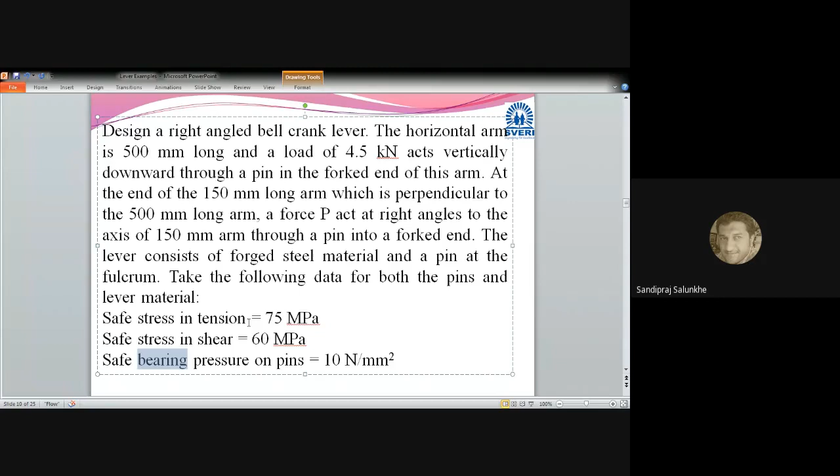Now read this statement carefully. You'll come to know that there are three pins of this bell crank lever which are connected to the lever.

Now see, this is a bell crank lever. One arm of this bell crank lever is 500 millimeter long, where W is attached. The other arm, which is vertical and 150 millimeter long, has force P applied, that is the effort. And this is the fulcrum point. So we are going to name it as B, F, A or A, F, B. This is what the lever is.

And we are going to consider B as the width of this lever and T as the thickness of this lever. This cross section is shown in this diagram. Do you get the idea how the bell crank lever is? Any question?

Now, when we start to solve this problem, it is given that FB, that is F to B distance, is 500 millimeter. Then W, which is at point B, is equal to 4.5 kilonewton, that is 4,500 Newton. F to A distance, that is the fulcrum point to the point where P is applied, is 150 millimeter. Then sigma T, that is allowable tensile stress, is 75 megapascal, that is 75 Newton per millimeter square. Allowable shear stress tau is equal to 60 megapascal, that is 60 Newton per millimeter square. And bearing pressure is 10 Newton per millimeter square.

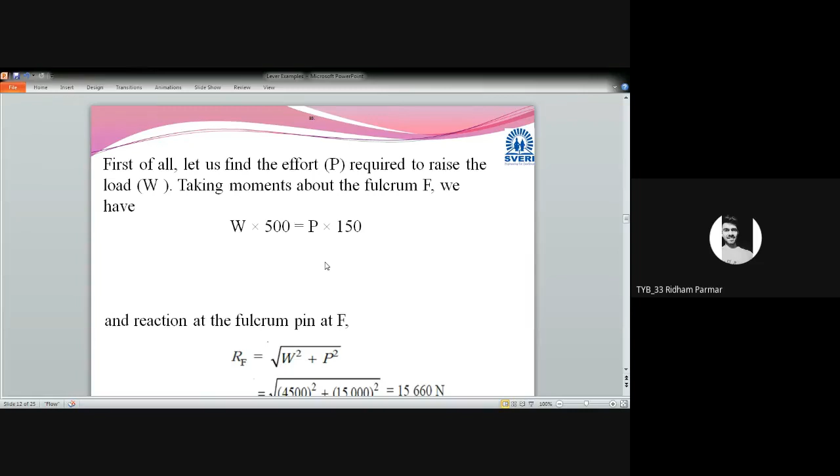Last two. Adesh Bankar. Hello? Adesh Bankar. Ritik Bhosle. May I know where Ritik Bhosle is? Ritik Bhosle. Can you unmute yourself or just type your message? Are you listening, Ritik Bhosle? Hello? Saurabh Dhotre.

Yes, sir, what answer did you get? Sir, continue. What? 2 minutes. Calculating, not continue. Continue means you are giving an order to the person talking with you, that continue.

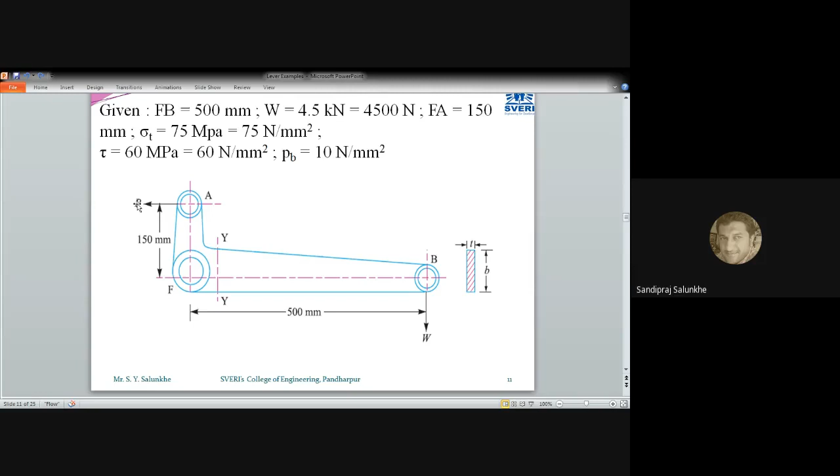So RF, that is the reaction at the point of fulcrum, we are going to calculate by means of this vector and this vector. Its resultant will be W square plus P square, whole under root. So we get that reaction, RF is equal to under root of W square plus P square, and that we get as the reaction at the fulcrum point.

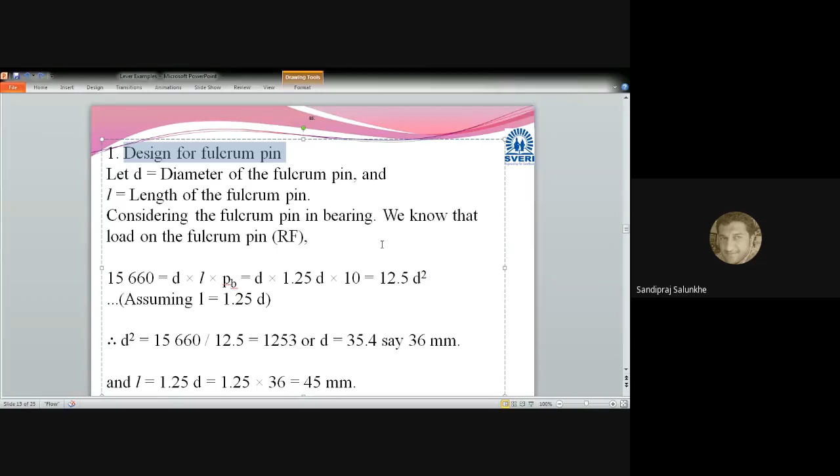Once you get this reaction at the fulcrum point, let's start to design this pin. So we are going to design the fulcrum pin. First, the pin which is joined at the fulcrum, that we are going to design. For that, let us consider small d as the diameter of the fulcrum pin and L as the length of this fulcrum pin.

And do you remember what ratio we have taken for length to diameter of this pin? Are you remembering? For yesterday's problem also we have taken that ratio. Hello? Hello?

We are going to consider that the length of the pin is 1.25 times the diameter. We have solved yesterday's problem also by assuming length of pin equal to 1.25 times the diameter of that pin. Yes, sir, right.

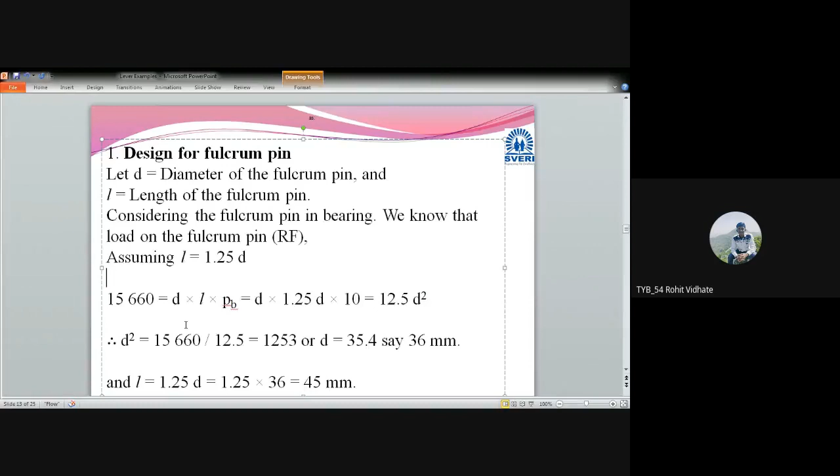Are you getting this point or not? Yes, sir. Or should I elaborate it? Should I elaborate? Yes, sir. Okay, I'll write here this formula by means of which we are going to calculate the pressure intensity. So this pressure intensity, P suffix b, we are going to calculate.

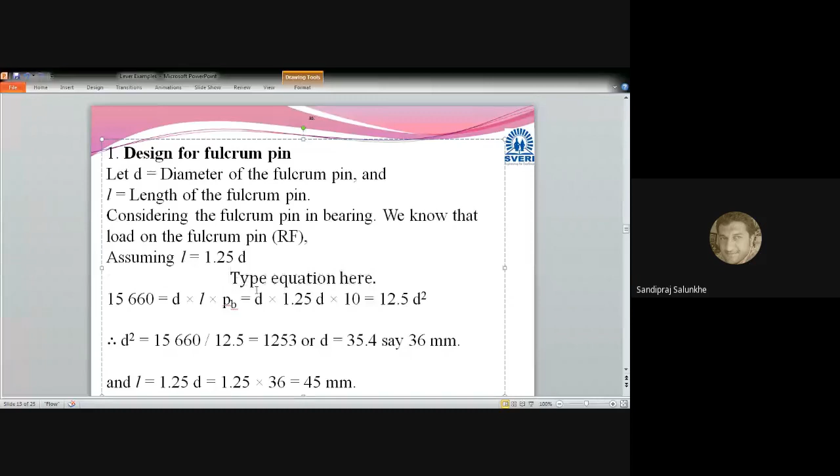This pressure intensity P suffix B is given by, how we are going to calculate pressure intensity? Force divided by what? Pressure is equal to force divided by area, right? So force which is coming on the fulcrum pin is 15,660, divided by what is the area of that pin?

Now as it is circular area, we are going to convert it into flat area. For yesterday's problem we have solved it. So area will be D into its length, L. So what we have done for this formula, we have converted it.

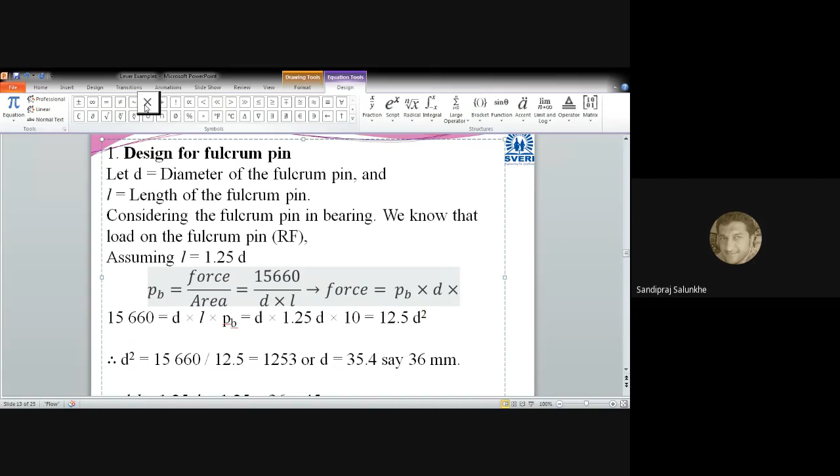This D into L is coming in at this point. Here I want it, D into L. So this pressure intensity formula we have written as force divided by area. Force is 15,660 divided by area, which is D into L of that pin. So how that D into L again we have taken?

Just I will draw here that pin. This is the pin which is inserted there. So what we are going to calculate is the area of this pin, and this area is calculated as this distance multiplied by this distance. That is the length of the pin multiplied by diameter of that pin, and that will become the cross sectional area of that pin, though it is circular. This is the circular area which is sustaining that pressure. We are going to consider it as a flat approximation, and we have considered it as a flat area.

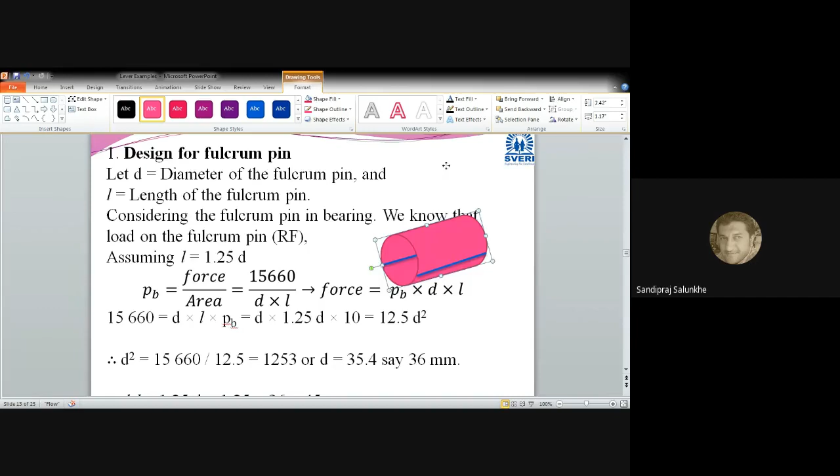If you are not getting it, please let me know. You can ask a question at that place only.

That's why we are going to put this value of L as 1.25 of D. And hence we get this W, that is 15,660, is equal to D, that is diameter of pin, multiplied by 1.25 of D, into intensity of pressure. Intensity of pressure is given as 10 Newton per millimeter square. So we have 15,660 is equal to 12.5 into D square.

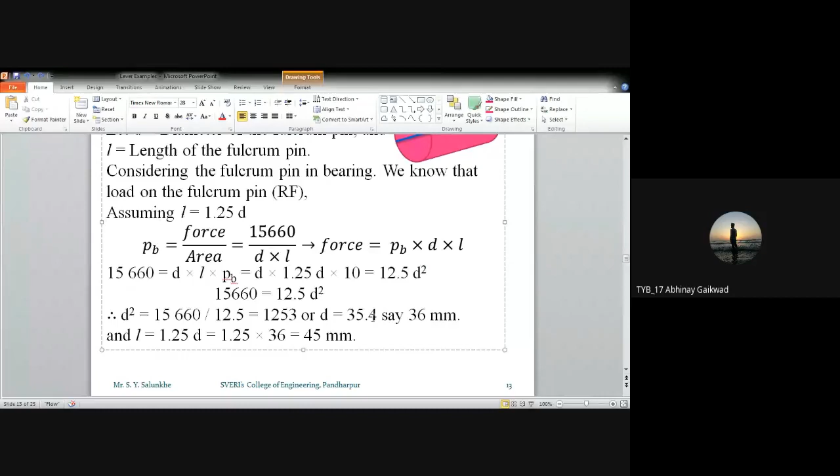From the above equation, we have got this equation. So one can calculate this D. So what value of D have you got? 35.39. Okay, you are getting this as 35.39. So we'll approximate it to 36 millimeter.

And from this, we are going to calculate length, because length is how much? Length is 1.25 times of D. That's why length of this pin is 45 millimeter. Is there any question related to this up till now?

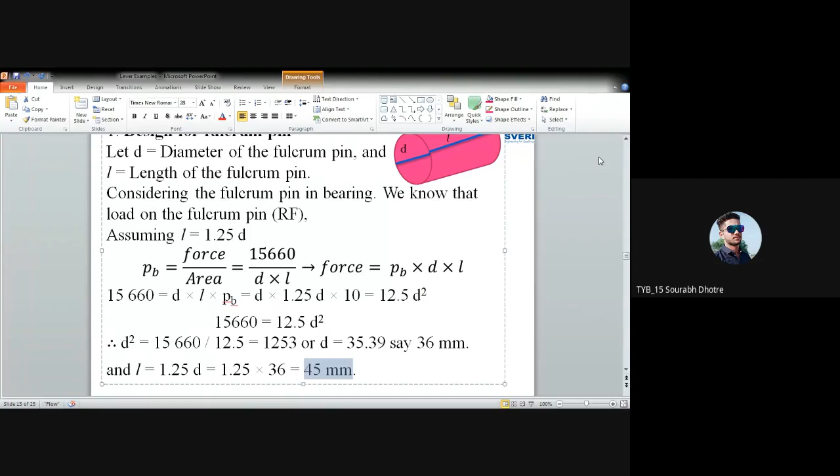Yes, Saurabh Dhotre. I'm not listening to you actually. Got it, sir? Got it?

Okay, so the next point is that you have to check this pin in shear. So what will happen in case of shear? What formula do you have to write? First, tell me what formula you are going to write considering shear stresses in this pin. It will undergo double shear, am I right?

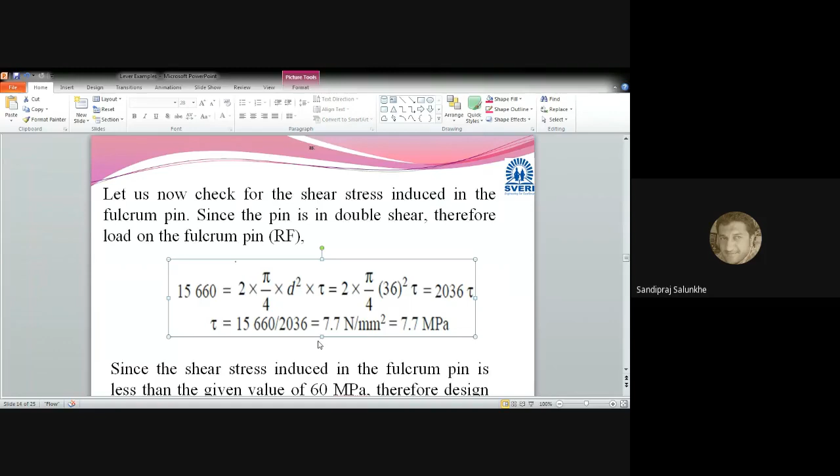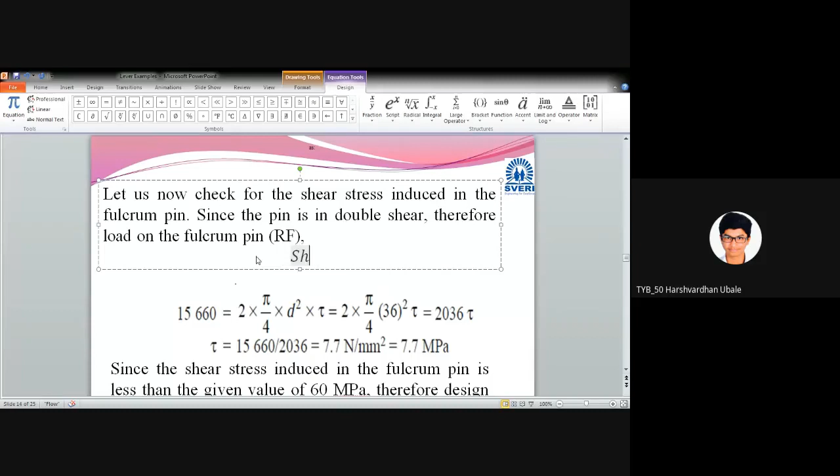Okay, so what formula can we write? Shear stress is equal to force per unit area. Stress is equal to force divided by sustaining area, am I right? Correct, yes sir. Okay, so what can we write next?

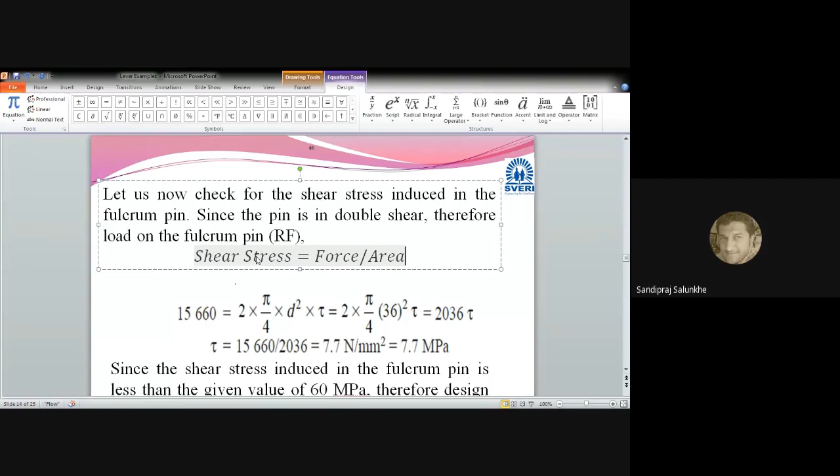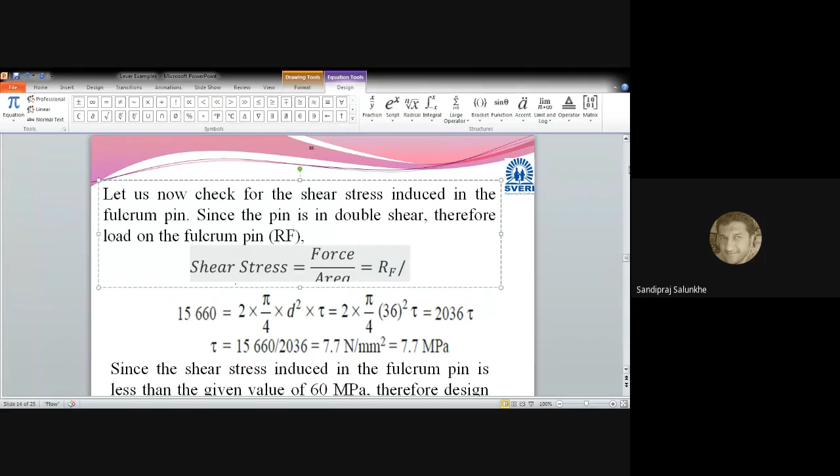How much force is acting on it? Fulcrum reaction, RF, right? So we have to write here as R suffix F. So fulcrum reaction divided by what will be the area? Now this pin will undergo double shear, so the area will get multiplied by 2, am I right? This will be sheared at 2 places.

Okay, what will the area be? 2 into pi by 4, D square. What will D be? That is the diameter of pin, squared, am I right? Yes, sir.

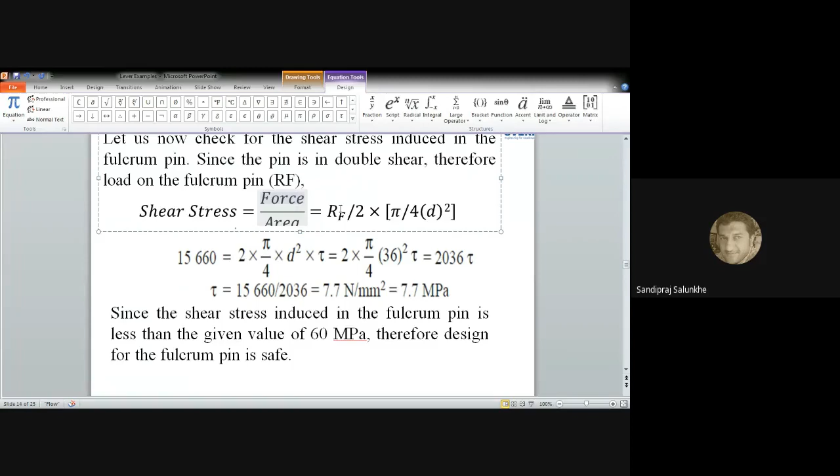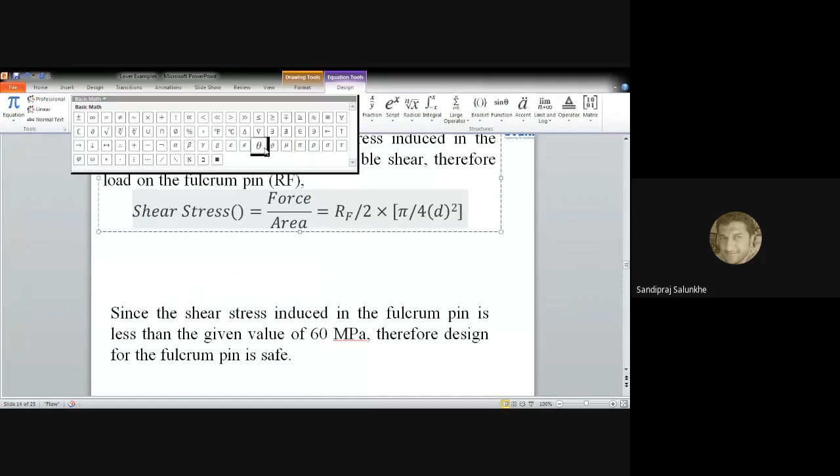So when we write this formula, you just have to calculate the value of tau. This shear stress is nothing but what we are going to write as tau. You tell me, calculate and tell me what value of tau you are getting. Later on, I will put my answer.

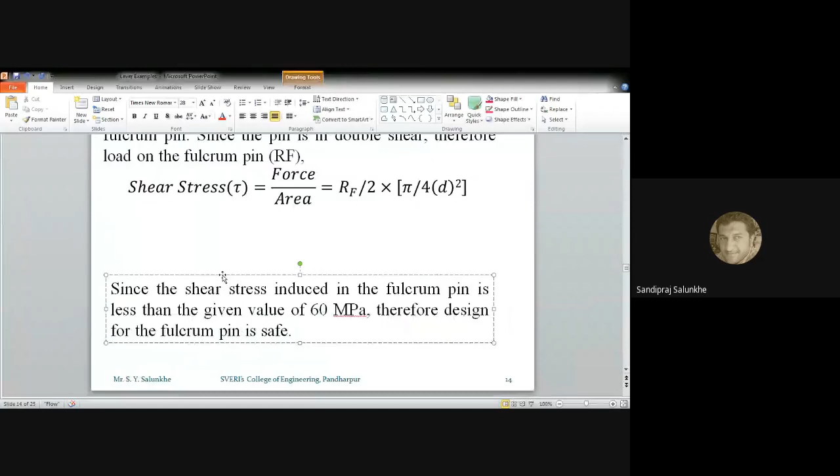Sir, 7.69. Anybody else? RF is known, D is known, just we have to calculate tau. 7.69, same sir. 7.69, 7.61, okay 7.69. Pratik Deshmukh, put your message for what value you are getting. Vaibhav More has written 7.69. Ekatpure, what value are you getting? Prerna Ekatpure, are you there? Snehal Mane, Prerna Ekatpure has written, okay, 7.69. So you have got it.

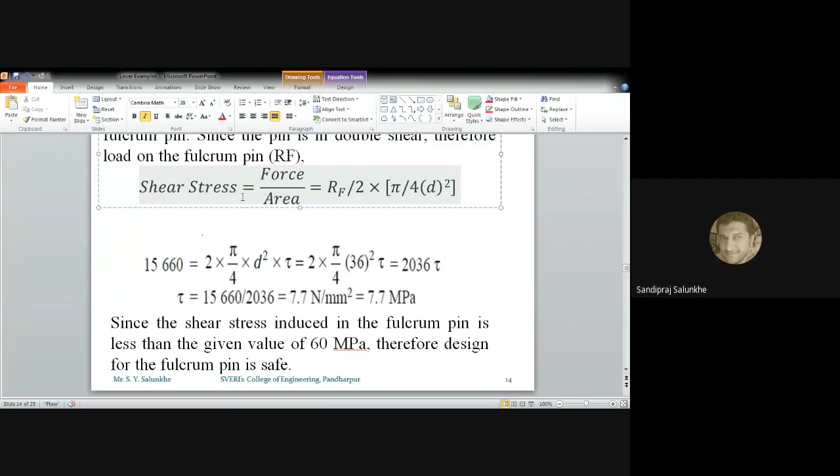It is approximated to 7.7. And what value is given in the problem for shear stress? What limiting value is given for shear stress in the problem, how much is it? 60 MPa, sir, right? So can we say that the dimensions which we have decided for the pin are safe? Yes, sir, yes, that's why it's not necessary to go again.

Somebody has asked me a question, what will happen if we consider other relations, that is if L is equal to 1.30 of D or if L is equal to 1.50 of D, we will get a different answer. Okay, but it's not necessary to consider that different value. Now see, this length is equal to 1.25 of D. That is the standard one we have chosen from the design data book, where guidelines are provided to the designer to make design simple. Okay, any question?

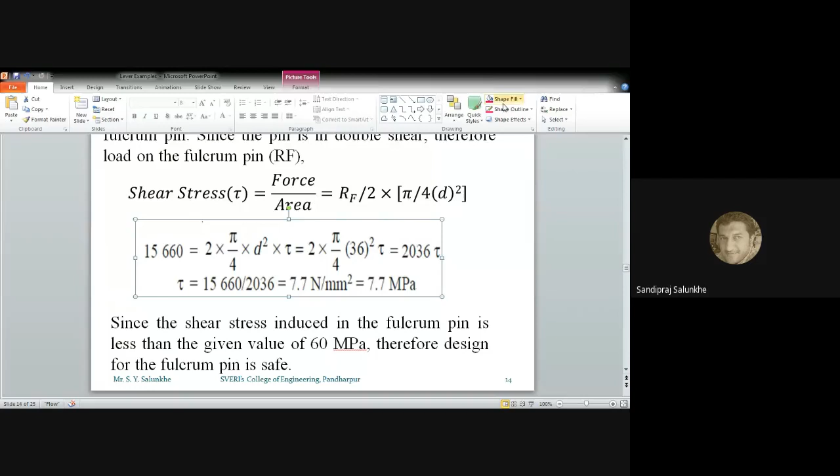So can we go further? Yes, sir, okay. One more question I would like to ask, whether this method is good, where I'm going to type here and you are getting it. Yes, sir, yes, yes. Okay, instead of only reading that slide and explaining it, if I write here and make the change, that will be better, is it right? Yes, sir, okay, okay.

Now we have designed the pin at fulcrum. Now we are going to design a brass bush which we are going to insert in that hole provided for the fulcrum pin. Let us assume the thickness of this brass bush is 3 millimeter. What thickness did we choose for the last problem, are you remembering? How many, sir? It was 2. Okay, here I have chosen 3. Yes, yes, yes.

So is it random that we can choose the thickness, or is there some logic behind that? Let me tell you one thing, this thickness of bush is decided as from 2 millimeter to 5 millimeter. Already in the first lecture, when we started this design of lever, that statement was there. From the design data book, it has been stated that bush thickness ranges from 2 millimeter to 5 millimeter. So here we have chosen 3 millimeter, one can go for 2 also, one can go for 4.

That depends upon how much force is exerted on that bush. The force is considerably high, how much is it? 15,660 Newton, that is the force, fulcrum reaction, which is acting on the pin as well as on the bush. That's why we have chosen the thickness of this bush as 3 millimeter. So the hole which we are going to drill on that lever, that bell crank lever, will be of size D plus 2 times the thickness from this side and from this side.

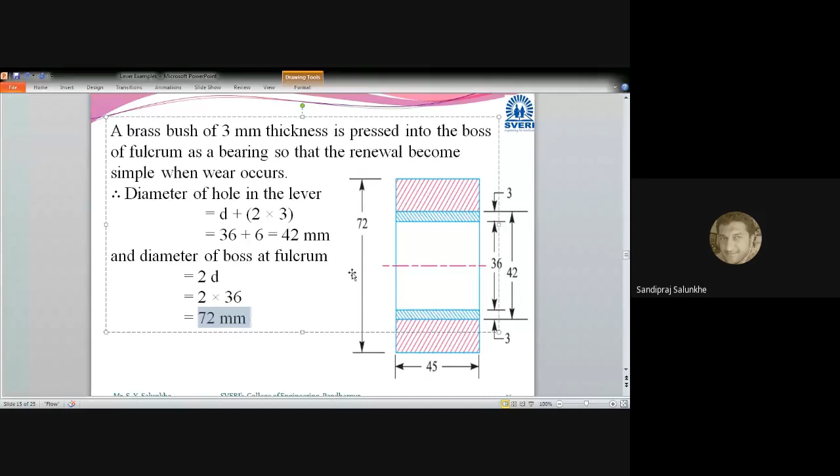Okay. Is there any question for this slide? Any question? Yes sir, tell me about the thickness again.

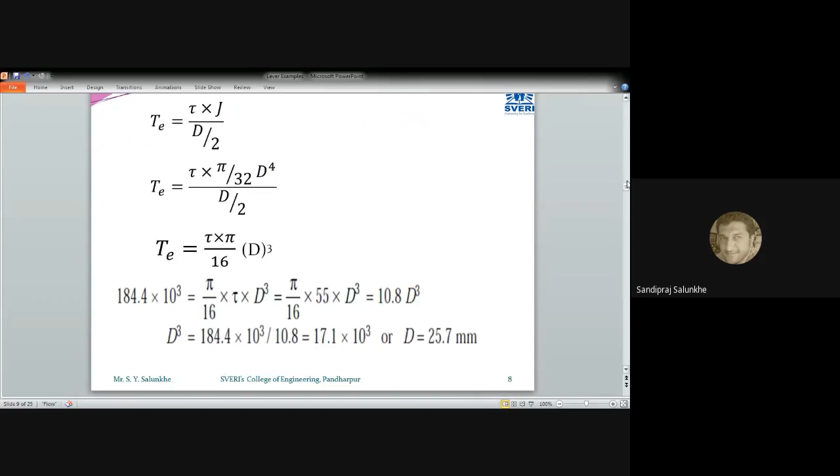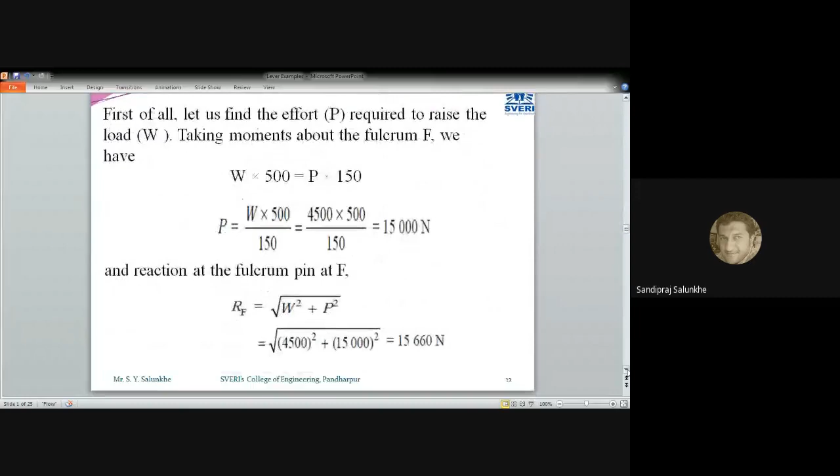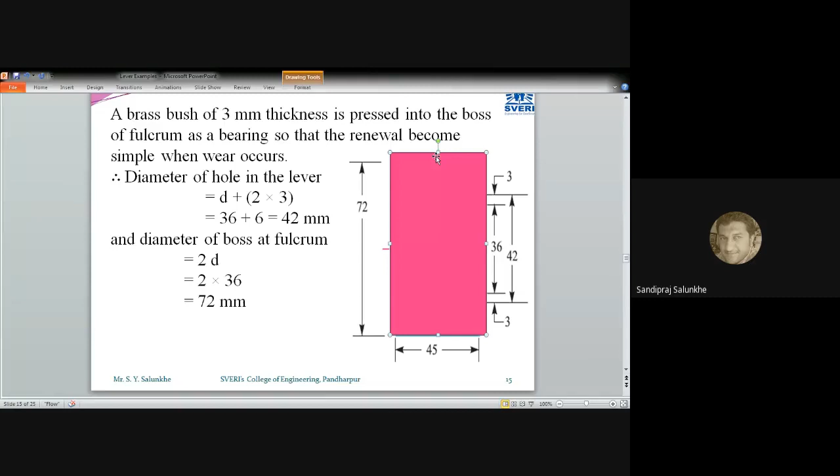This pin, okay, this thickness that we are going to increase by means of, here we are going to have now this 45 millimeter is nothing but the length of the pin which we are going to insert here. But as we are going to get this thickness which we have to increase, above which we are going to have one rectangle which will indicate as a lever.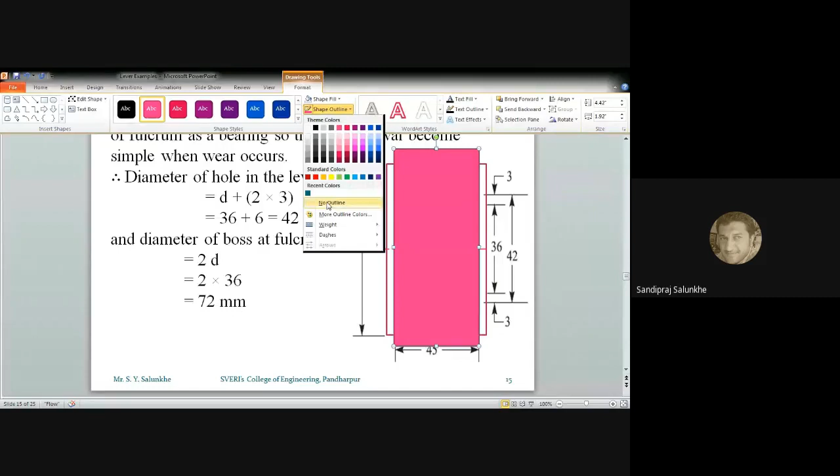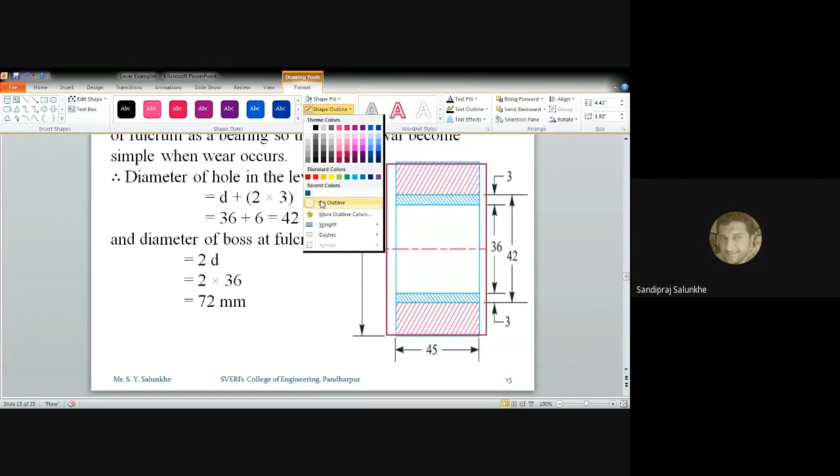Are you getting this? Now there are three rectangles. One rectangle is related to the length of this pin. This red one is indicating as increased thickness of this lever, and this black rectangle is related to the actual lever, where we have considered the cross section of that lever.

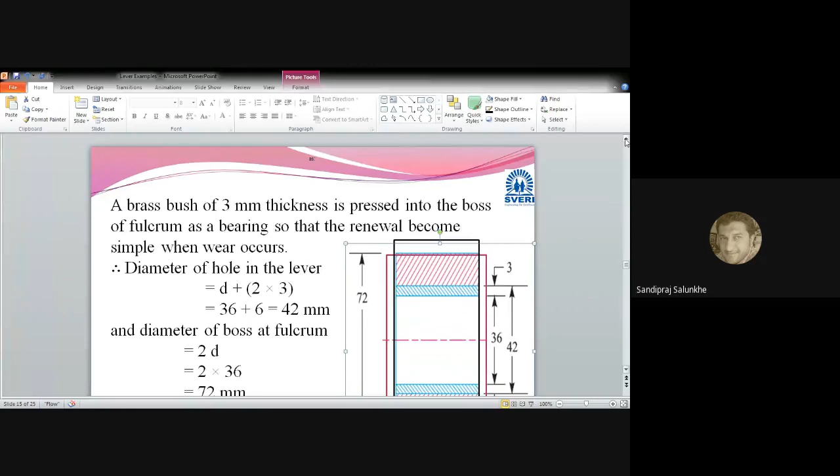And this thickness is increased to compensate that hole which we have provided inside that solid lever. See, this rectangle T and B is nothing but that black rectangle which we have considered here. And this red rectangle is nothing but the thickness which we have increased for inserting this pin and this bush inside this lever.

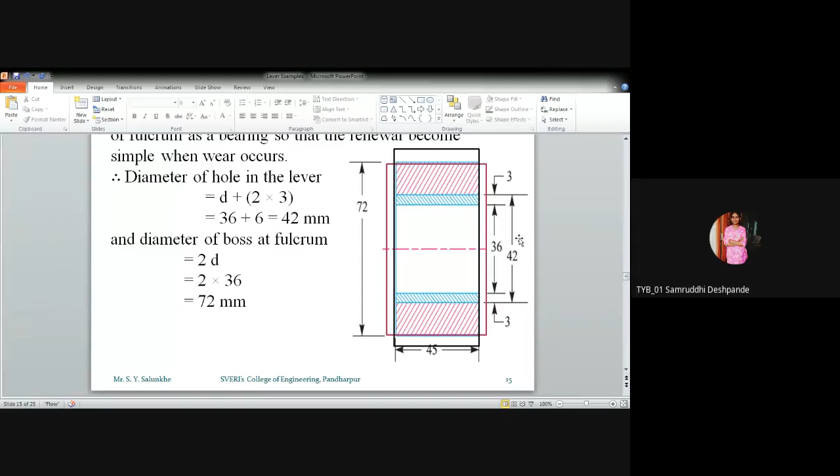I got it? Hello? Yes sir, yes sir, okay. Any other question?

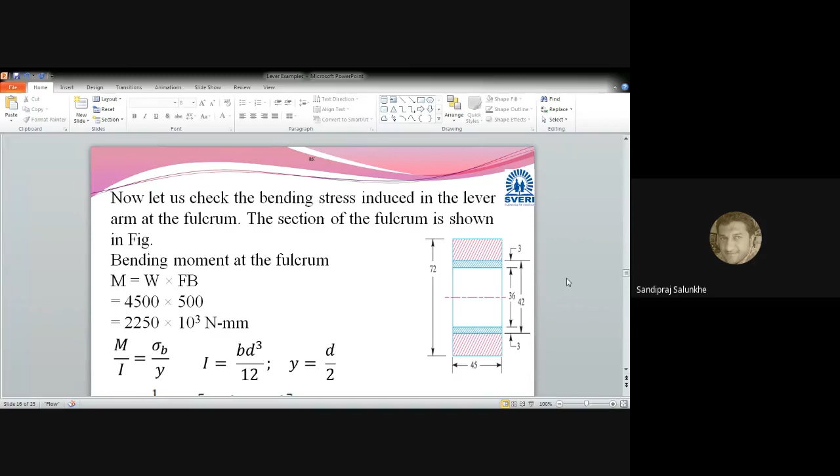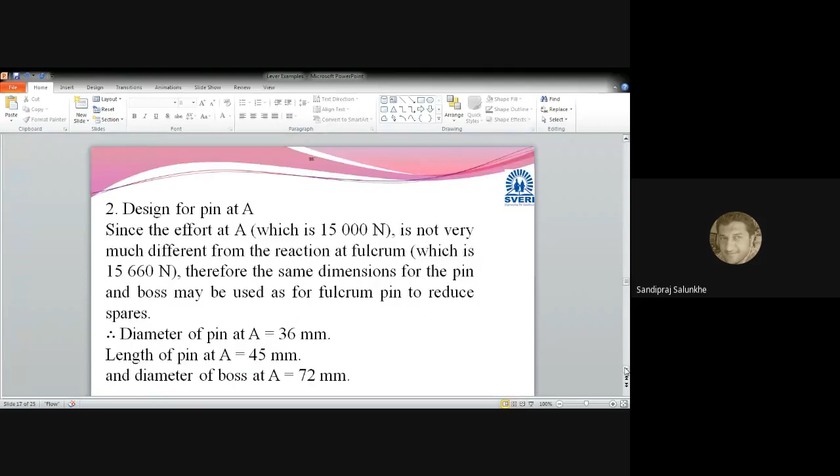If not, then we are going to consider that the pin which we are going to insert at fulcrum point, same pin will be used for the pin at point A and at point B also. So pin which we are going to insert at point A, where is point A? For that we will see once again this diagram. Now this point A, where the pin is inserted, same dimension of that pin which we have calculated at F point will be used here.

And now we have to calculate the pin which we can insert at point A. So in this slide, it has been written that the effort at point B, F and A are not differ much more. It is 15,000, and that F which we have got is 15,660. That's why same dimensions of pin are used at point A also.

So you can mention, while solving the problem in exam, that effort is not much more than the reaction at fulcrum. That's why same dimension. And again, if the effort will be higher than the force which we have considered at point F, then you have to go for redesigning.

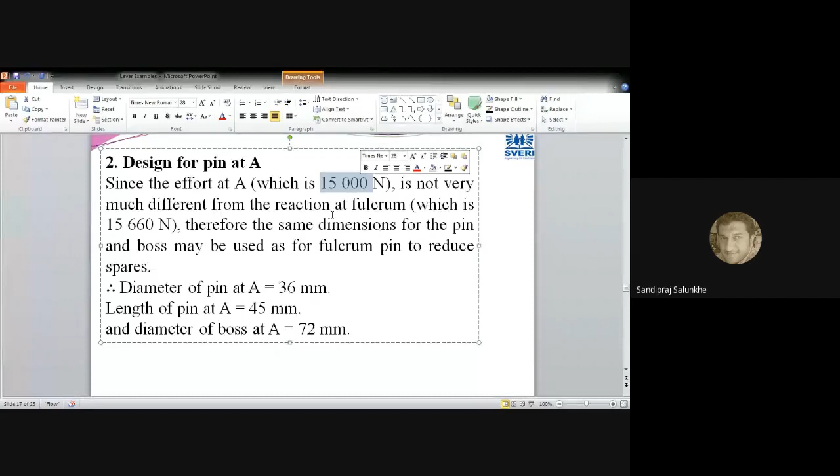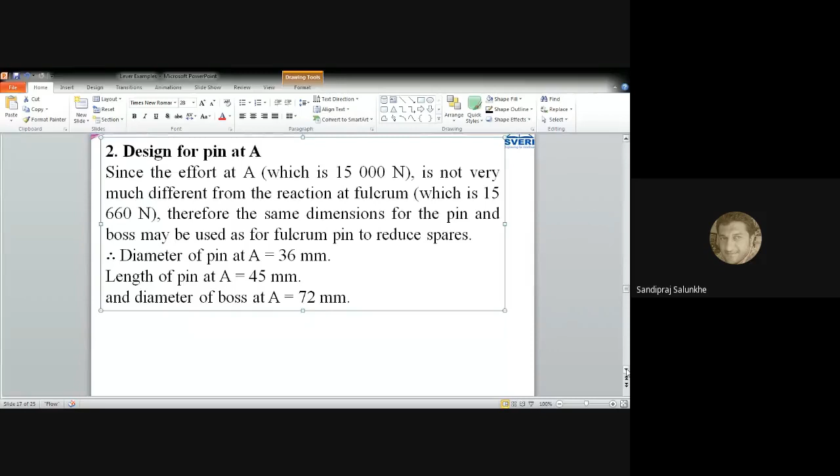Okay, now we are going to calculate dimensions of pin at point B. Now if we take the same dimensions at this point B, will they work? It's a simple question.

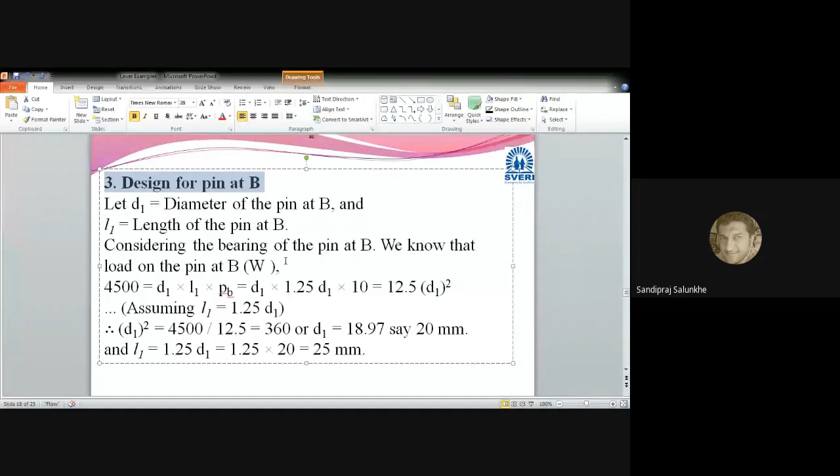Where load W is acting, and reaction at fulcrum we are getting as 15,660. How much is W? W is 4500. 4500, right. But will the same dimensions work? No sir. Why not?

15,660 ला जर टिकत असेल तर 4,500 ला टिकायला पाहिजे किती? Sir, cost वाढणार राईट, नाही. कारण तिथं डायमेन्शन्स खूप जास्त घेतले जातात आणि अननेसेसरली मटेरियल तिथं जास्त जाईल. मग बरोबर आहे, पिन होईल तिथं, म्हणजे एकदम मजबूत पिन होईल तिथं, पण तेवढी गरज नाही.

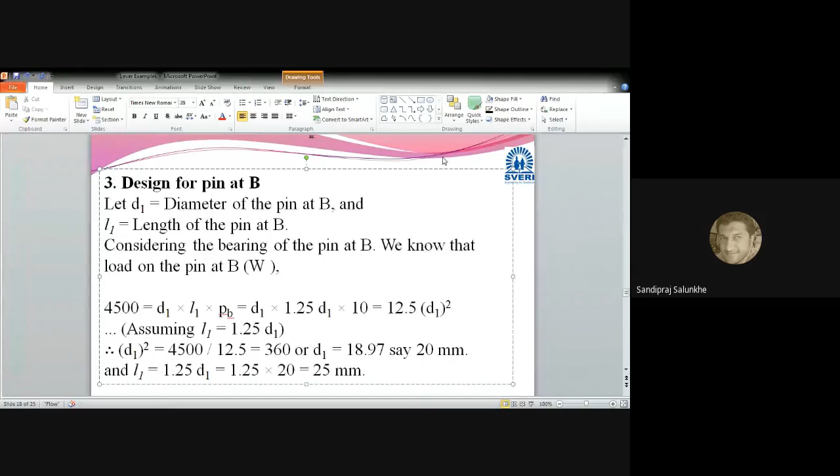That's why unnecessarily cost will get increased. Right, so we have to calculate the dimensions of pin which we are going to use at point B. परत एकदा बघा, त्या बी पॉइंट वर ऍक्ट होणारा जो फोर्स आहे दॅट इज डब्ल्यू, विच इज व्हेरी लेस ऍज कम्पेअर्ड टू द फोर्स विच इज ऍक्टिंग ऍट पॉइंट एफ अँड ए. एफ आणि ए मधला फरक फक्त 660 न्यूटन होता, पण एफ आणि बी त्याच्यामधला फरक किती आहे?

15,660 वजा 4,500. ओके, जवळजवळ 11,000 न्यूटनचा. दॅट्स वाय इफ वी आर गोइंग टू यूज सेम डायमेन्शन ऍट पॉइंट बी, पिन खूपच स्ट्रॉंग होईल तिथली, आणि तेवढी स्ट्रॉंग पिनची गरज नाही. अननेसेसरली मटेरियल वेस्ट जाईल, अननेसेसरली कॉस्टिंग वाढेल. So we are going to design dimensions of pin which we are going to use at point B.

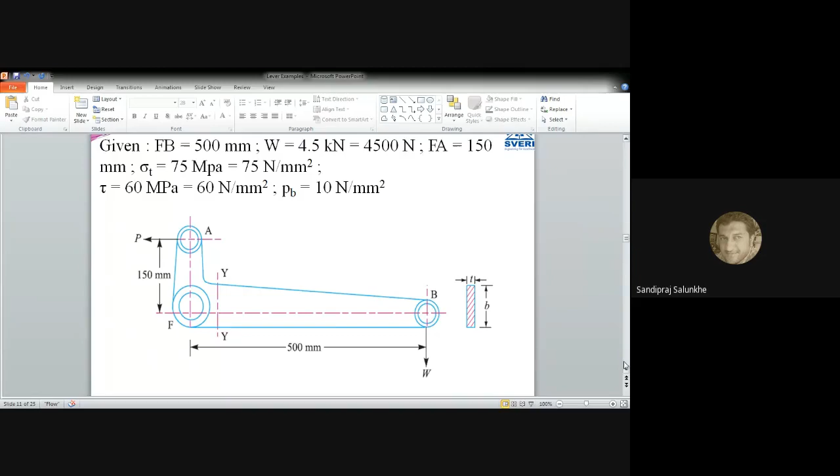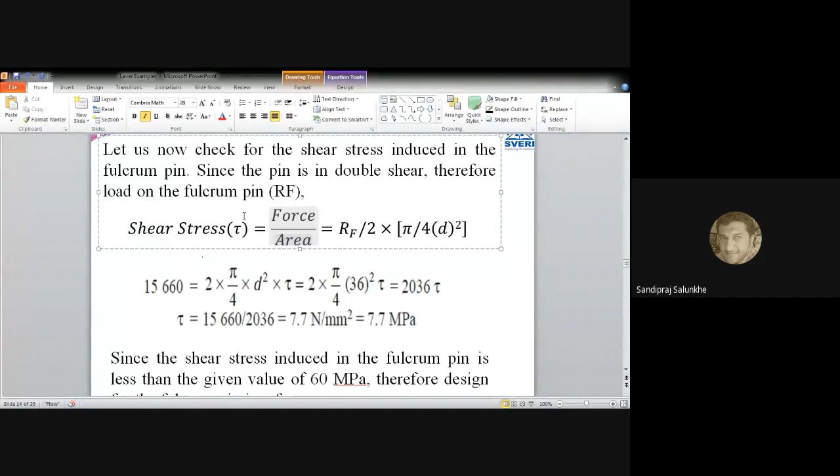Then same procedure. First of all, what we have to do? We have to consider bearing pressure, and from bearing pressure we have to calculate same formula. I will copy it from here. Shear stress, not shear stress. I require this dimension.

Is it right? Intensity of pressure is equal to force divided by area. So intensity of pressure is equal to force. How much force it is? 4,500. Right? D. Now here we have considered D suffix 1 as a diameter of pin which we are going

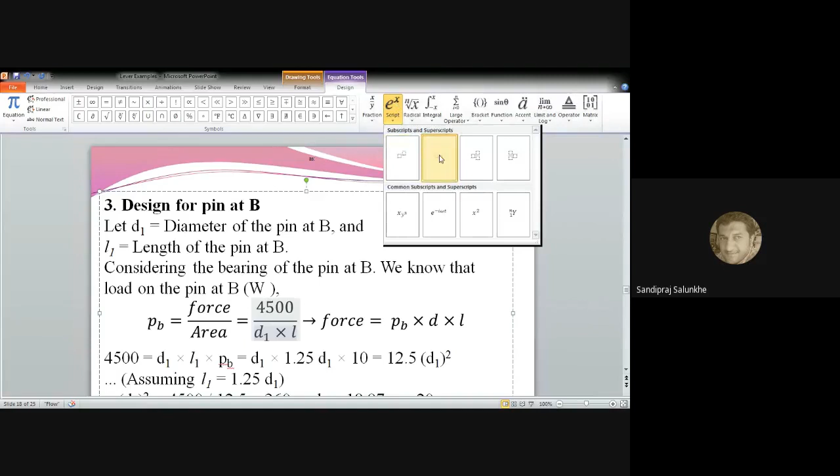to use at point B, and L suffix 1 as a length of that pin which we are going to use at point B. So here I have to change it and I have to write it as a D suffix 1 instead of writing D. And this L also I have to replace by means of L suffix 1. Okay. This D also I have to replace by means of D suffix 1.

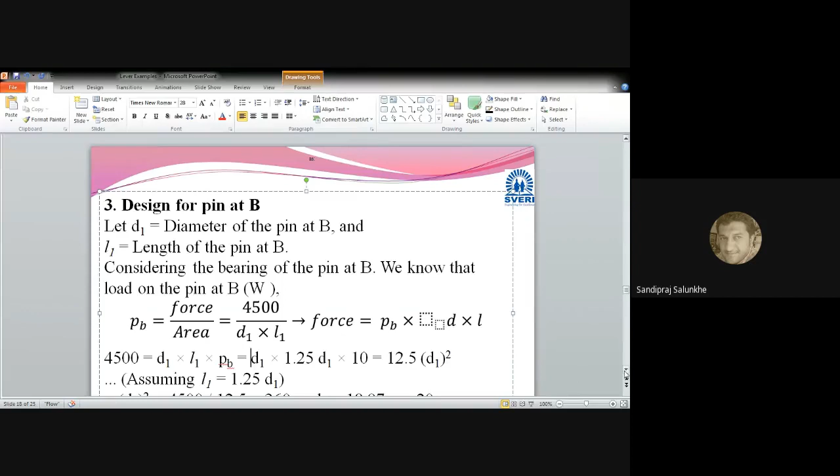Do the calculation meanwhile. I'm going to write it, but you please do the calculation what D and L you are getting.

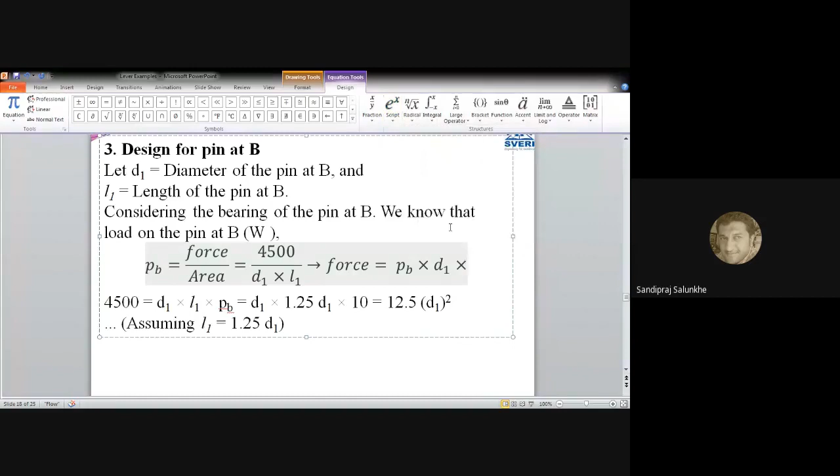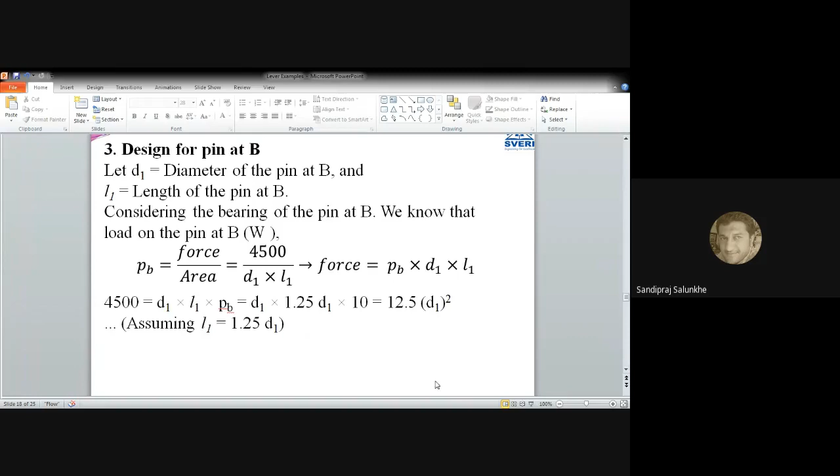19. 19. D1, 19. We are getting D1 as a 19. And what L? 24. 24. 24. Okay, anybody else? If you have done calculation, please tell me. Same, sir. Same. Okay. You can write in comment box also.

The other people, those who are doing the calculation, like Dikshit. Manthan Dikshit. Yes, sir. What value you have got for D1 and L1? Same, sir. I want a value. Same means what? 19 and 25. 19 and 25 millimeter. Okay. Anybody else?

अजून कोणी कॅल्क्युलेट केले का? So value which we are going to get for D1 is 19 millimeter, that is 18.97, approximated it as a 20 millimeter. You have approximated it to the 19 millimeter, no problem. Okay. And L1, that is the length of that pin, you have approximated to the 25 millimeter.

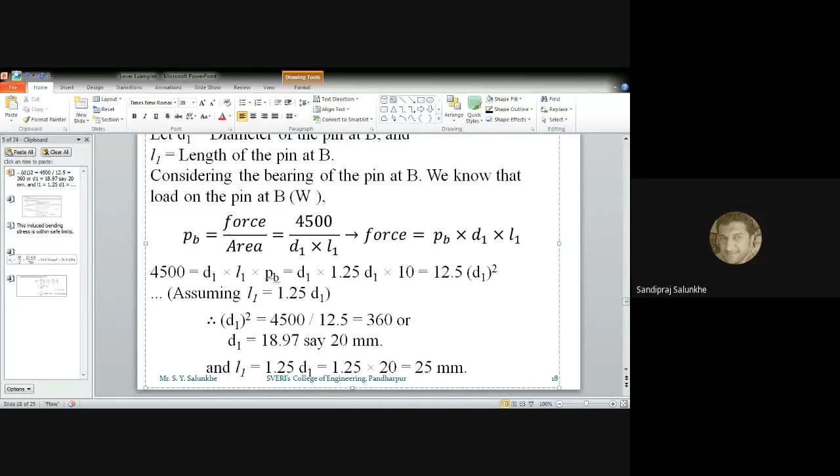Okay. Now, as per this slide, is there any question? Hello? No. No any question. Okay. Can we go further? If you have any question, you are free to ask.

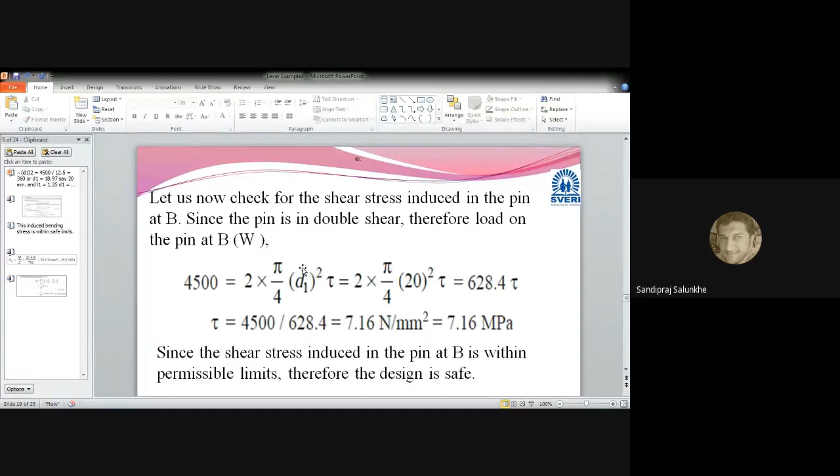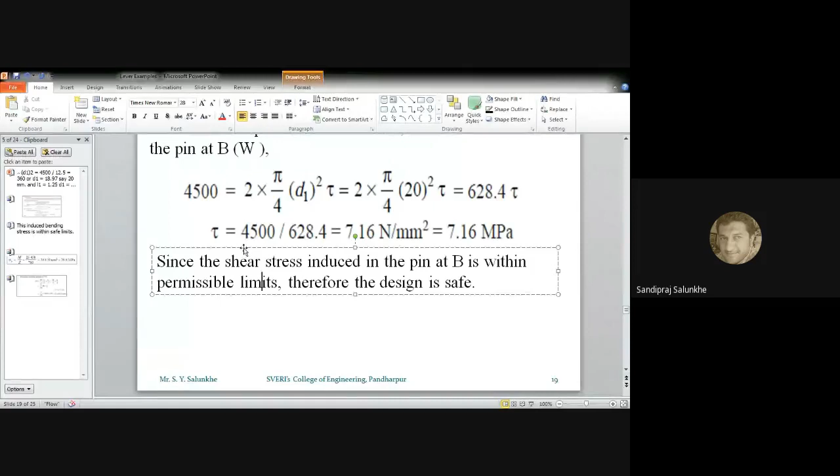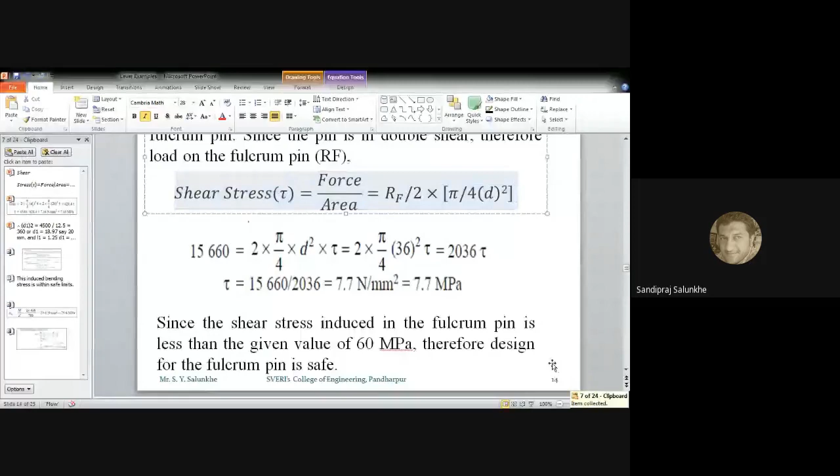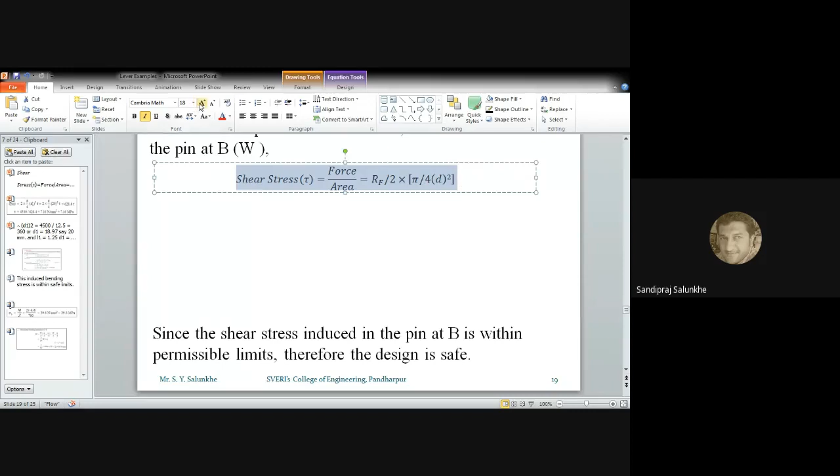Now this pin has to be checked for shear stress. Am I right? Hello? So how you can check it for shear stress? Can you calculate value of shear stress? What shear stress is? Shear stress is equal to force divided by area which is undergoing for the shear stress. So force which is acting, that is how much?

W divided by 2 into pi. What I have to write here? D1. D1. So D suffix 1. Now you know that W is how much? 4,500. D you have calculated 20. You take 20 as a D1 and calculate value of tau, and you just tell me what the value of tau you are getting. 7.16.

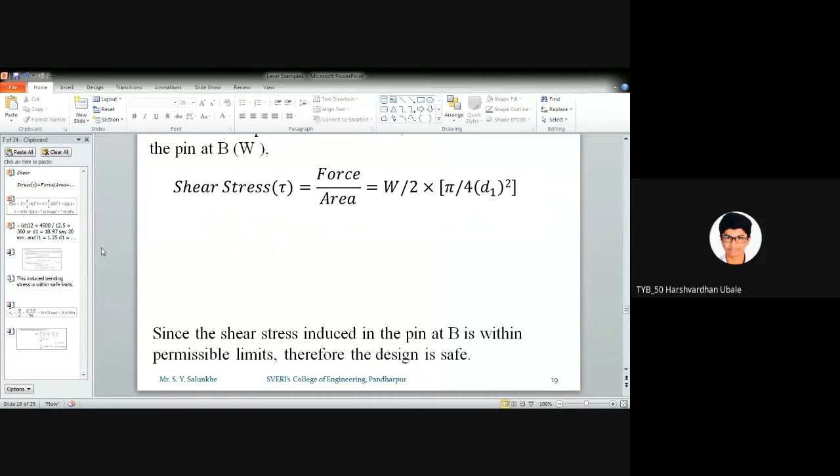7.16. Okay, 16. Anybody else? अजून कोणी calculate केले का? 7.16. 7.16. Yes, it is 7.16 Newton per millimeter square.

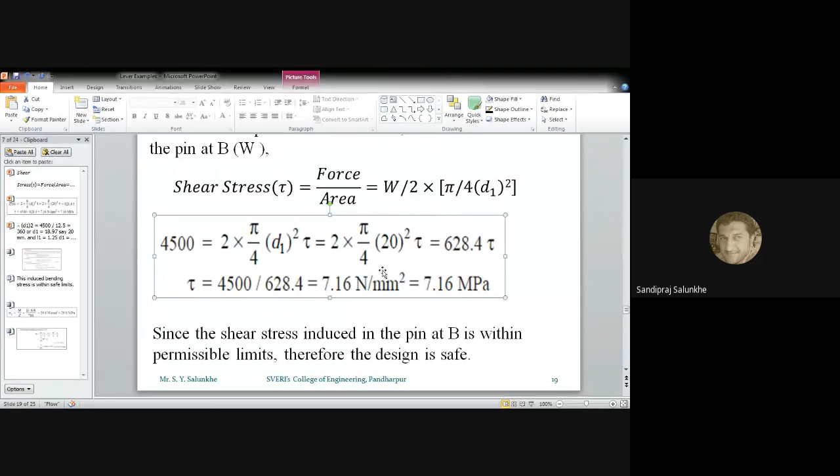Okay. So we have got this value, and whether this pin is safe now in shear stress, what value, limiting value is provided for the shear stress? Yes, sir, it is safe. Why? Because limiting value of shear stress is 60 megapascal, whereas the induced stress is 7.16 megapascal. That's why definitely this stress will not exceed by this pin or dimensions of this pin. Hence, this pin is safe.

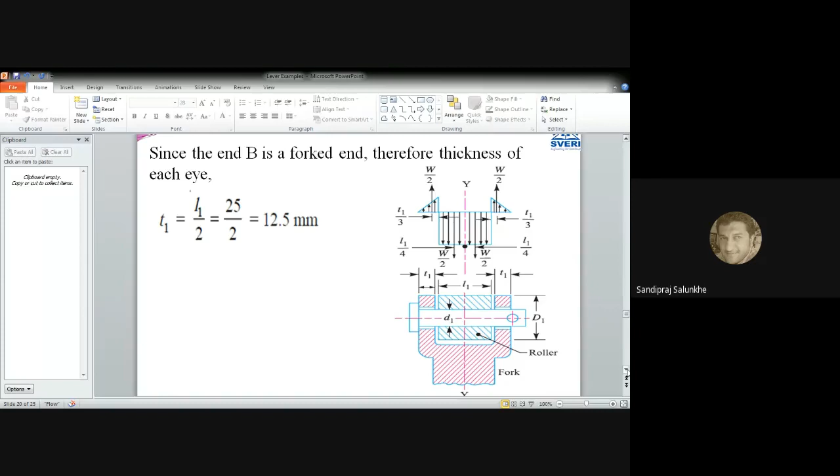Now we have designed pin at point F, we have designed pin at point A, we have designed pin at point B. Now what is remaining? Hello? What is remaining? Now we have to calculate, or we have to design lever.

Before that, we have to design bush which we are going to provide at point B. So this bush is provided of thickness 2, okay, or same bush of thickness 3 we can take here. So bush inner diameter will be, or diameter of that bush will be D1 pin diameter plus 2 into thickness of that bush. Should I write here once again, bush?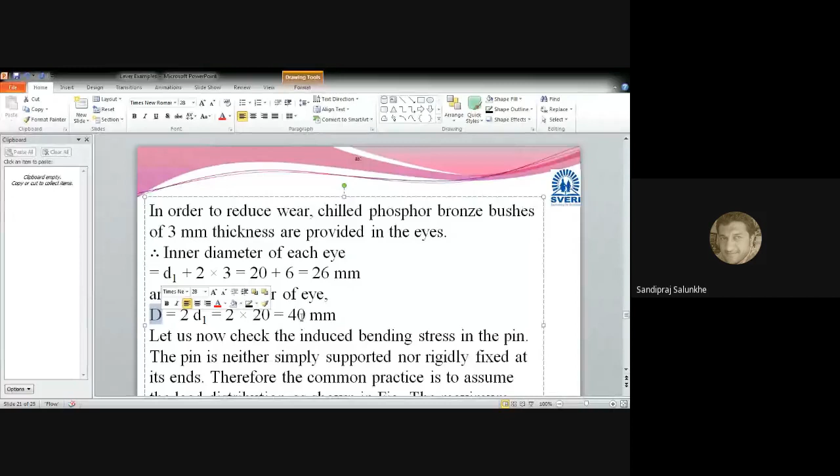So the hole which we have to provide on the bell crank lever is 26 millimeter, and also the outer diameter, that is, we have written it as capital D. It is 2 times the diameter of the pin, and that is equal to 40 millimeter.

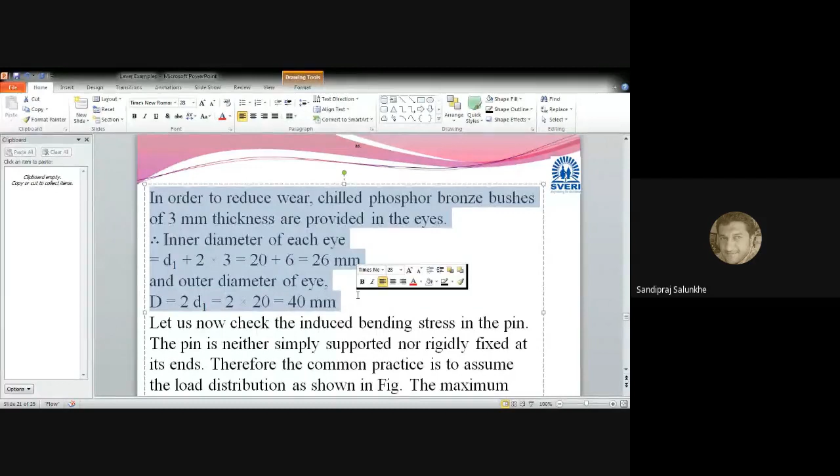So we have calculated this bush dimensions. I will take this first and later on we'll go for the designing of that lever. Before that, just we have to check whether the bending stress which has induced in the pin is able to sustain that bending stress or not.

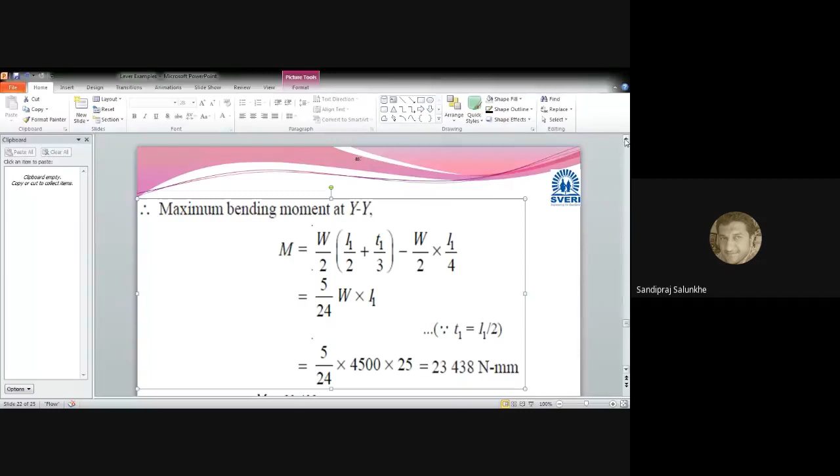So for that, we are going to consider this as the bending moment of the pin which has been inserted. That pin which has inserted at point B is sustaining load W. Now this pin which is inside the lever has a length equal to L1.

We'll consider the thickness of the fork in which the pin is inserted as T1, and this T1 is calculated as L by 2, that is a standard formula which we have taken from the design data book. There is no other way, or we can calculate shear and all the stresses induced in this fork, but the thumb rule is that the thickness of this fulcrum or fork can be taken as half of the length of that pin.

Or the length which we have considered inside the bush. Are you getting me or not?

Now here, this is going to provide load W in the upward direction. So this much part will undergo the W by 2 force, and the remaining part will undergo the force acting in upward direction as W by 2. Now, same way, the pin is subjected to the downward load because it is providing reaction, and that is equal to W.

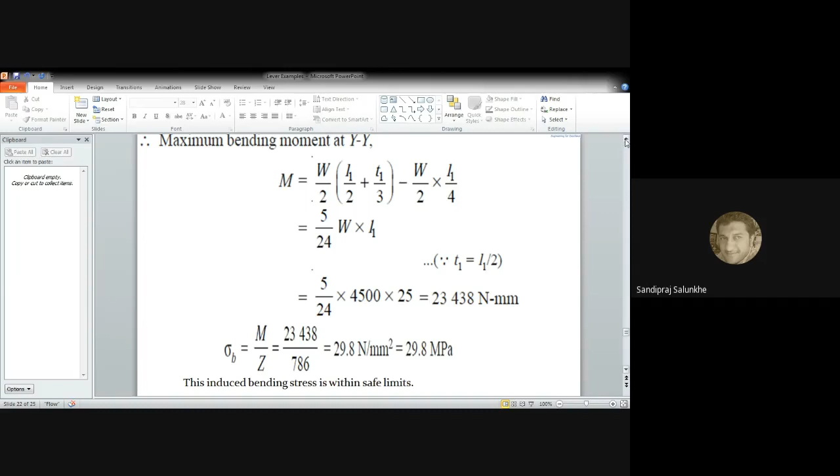So force multiplied by distance, that you are going to calculate as the moment, minus the reactive force, that is nothing but, again we'll see this diagram. Should I explain it once again?

Hello? Yes, sir. Okay, yes sir. So we'll take moment at the YY section. Are you agree with me?

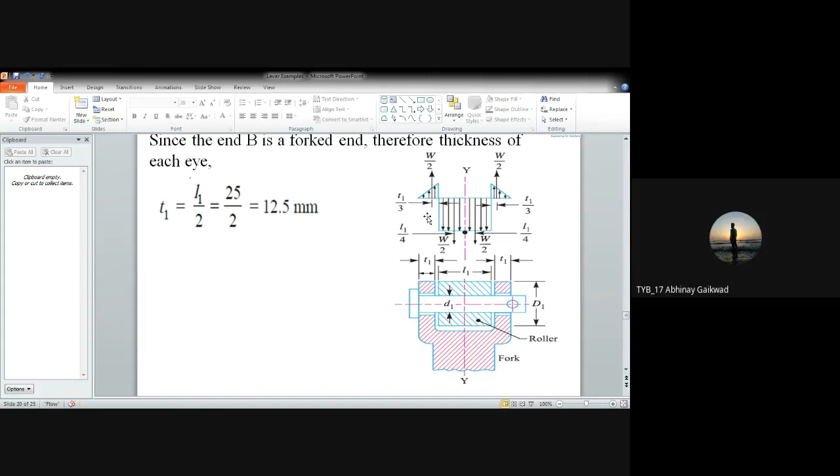Correct. Now I'll draw this as a cantilever, one single lever. Okay, I'm going to take moment at this point where I can insert this point. I'll call it as point O.

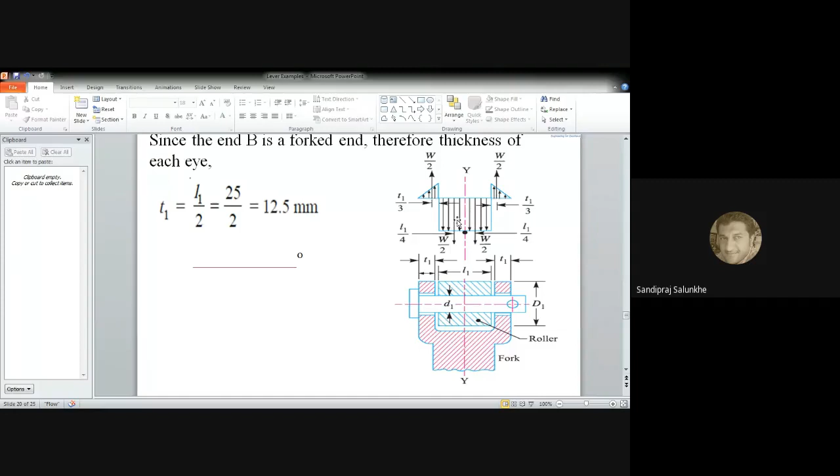Okay, now this W by 2 is acting. This W by 2 is acting somewhere here in downward direction. What is the length where this W by 2 is acting from point O?